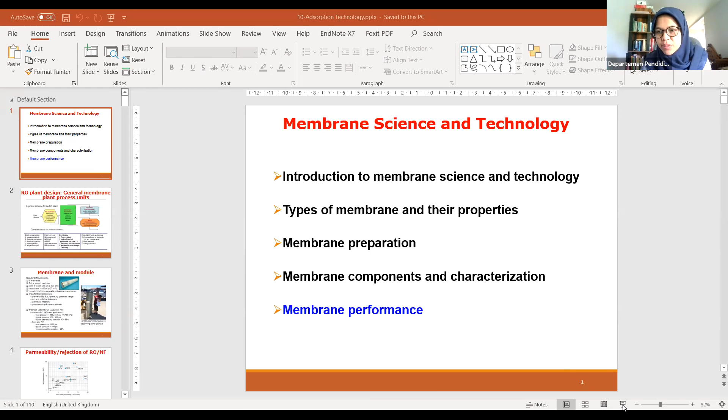Do you need to wait until 8? I think it's okay. You can deliver some introduction or information to the students before your lecture. My clock shows 7:58, so 2 minutes more left. Maybe I'll just start, okay.

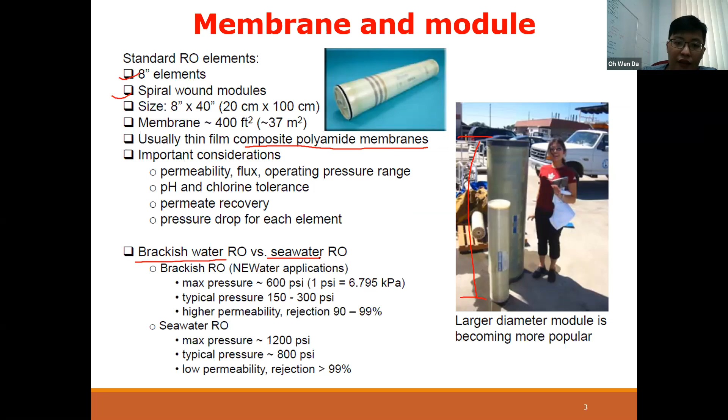So here's some information on the different types of commercially available membrane. These are all the commercial names of the membranes. The gray color one is the RO membrane, and the blue color one is the NF membrane. You can see the difference in terms of rejection—we call it NaCl rejection. As expected, nanofiltration is not as good as the RO membrane in terms of rejecting the salt.

But of course, there's a cost for high rejection of NaCl. If you have high rejection of NaCl, you probably have a lower pure water permeability. You can see that here.

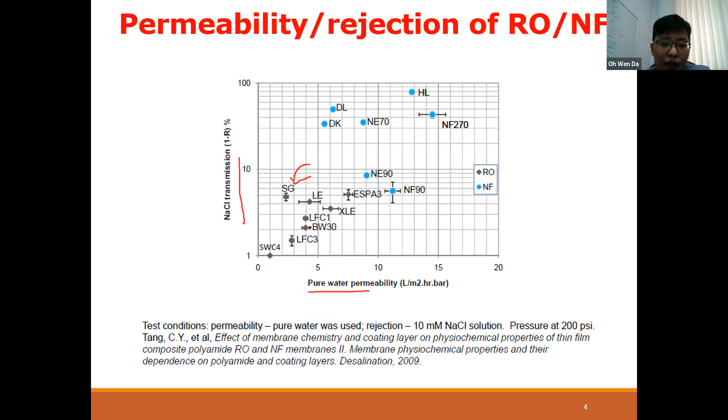Okay, so when you purchase a membrane, usually you will get this kind of brochure. This information will tell you about a lot of things. You can know what is the sodium chloride solution concentration that it tests, the permeate recovery, pH range, and so on. All these data are available and provided by the manufacturer.

Okay, so this one is also the same. I will not talk a lot on this, you can go through it. And this one, the chlorine tolerance, is important.

When you want to apply a particular membrane, you need to check the operational temperature. Usually the polymer membrane or organic membrane cannot tolerate a high temperature. For polyamide, you can only go up to, I think, 45 degrees Celsius. For ceramic membrane, you can go higher, up to 100 degrees Celsius or maybe higher, depending on application. Of course, water boils at 100, right? So that means we usually apply ceramic membrane for other applications.

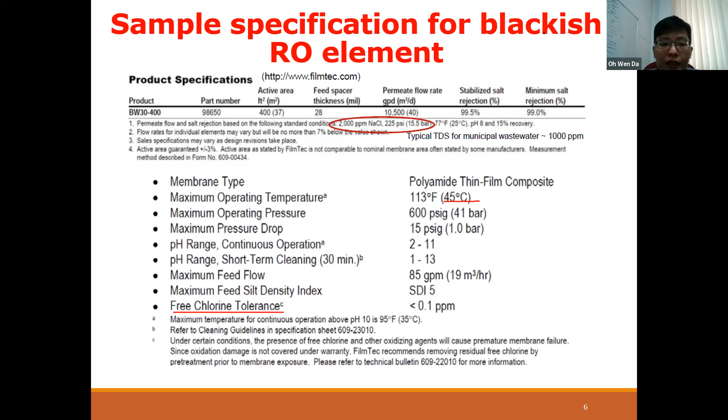Okay, so for membrane pressure vessel, this one is what we call a pressure vessel. This whole thing, and inside this pressure vessel, you can see there are a lot of these things, this box here - each of these is a membrane element. So you usually have 6 to 8 elements inside the pressure vessel. Usually we represent it this way: the feed comes in, and this is how we draw each of these pressure vessels.

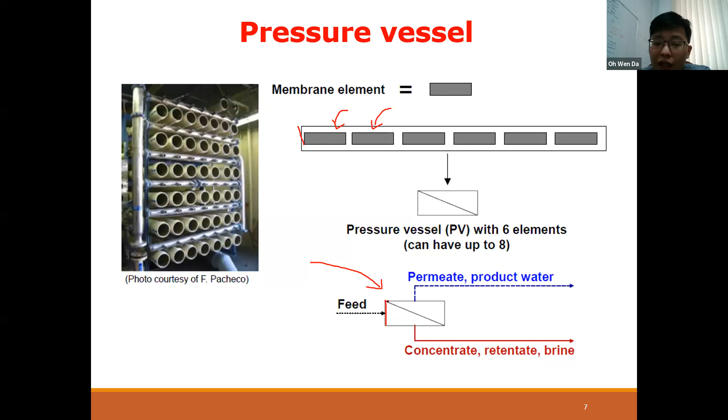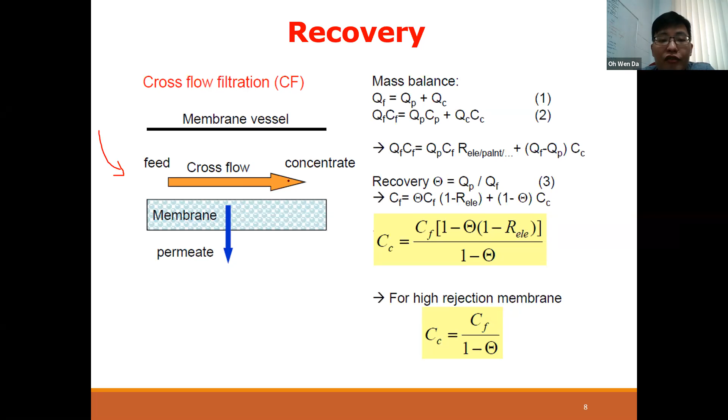So some additional information for you to know - we can calculate a lot of different parameters using all these equations, for example mass balance, recovery, and rejection. For real application, if you go to the RO plant, usually they apply the cross-flow filtration configuration. I hope you still remember this configuration, we talked about it last week. This is usually used for UF, NF, and RO membrane. Very seldom you'll see people use the dead end configuration, because of the fouling factor.

So if we look at the recovery data - by right, if you want to recover more water, you will need to use more energy because you are pushing the water against the osmotic pressure. For seawater, osmotic pressure is very, very significant, very high. That's why sometimes it's more economical to recover only part of the water, maybe up to 50%.

For example, I have this NEWater recovery. This NEWater is secondary effluent water - the secondary effluent from a wastewater treatment plant. After the secondary treatment, it is channeled to the RO system, and this RO system allows recovery of the secondary effluent. So NEWater is a trademark name for secondary effluent reclaimed water in Singapore. If you go to Singapore and mention NEWater, most people there know exactly what it is.

So the advantage of having high recovery is that you probably have lower feed flow rate for a given permeate, and the other one is smaller volume of concentrate generated, meaning the brine or waste that you have will be a lot smaller compared to when you have lower water recovery. So when we talk about recovery, it means how much water, what percentage of water, you can take out from the wastewater. Let's say you have seawater and you can take out 50% of water from it - that means your recovery is 50%.

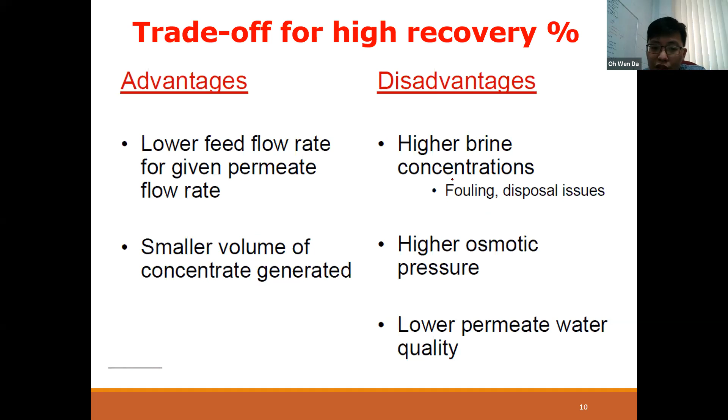But the disadvantage, if you are using high recovery mode, you tend to have fouling, probably higher osmotic pressure, and lower permeate water quality. Usually when you have this higher recovery, that means on the other side you have very high osmotic pressure, so some of the contaminants from the waste on the concentrate side may leach into your permeate water. That's why you have lower permeate water quality.

Today we want to try to see whether we can achieve zero liquid discharge, to an extent where we can recover 100% of water. There are advantages of doing so - it will give you more water, you don't have to worry about the water problem. It will cause less environmental problems, because the waste generated from recovering water will be lower. If you can recover 100% of water, those wastes will probably become solid. If you remove all the water from seawater, you will have all the solids remaining in your container - that is the salt and dissolved solids.

Another consideration is that you will probably have increased regulatory pressure on brine disposal. But of course there are also penalties like lower water quality, higher osmotic pressure, and so on.

So you can see here in this figure, this is in Sydney. They are doing this kind of treatment, trying to recover the secondary effluent. In general, if you look at water treatment using RO technology, you want to use the zero liquid discharge method, which means you want to recover all the water up to 100%.

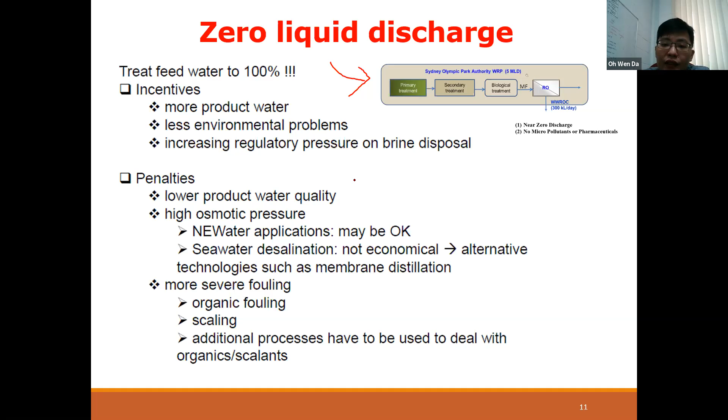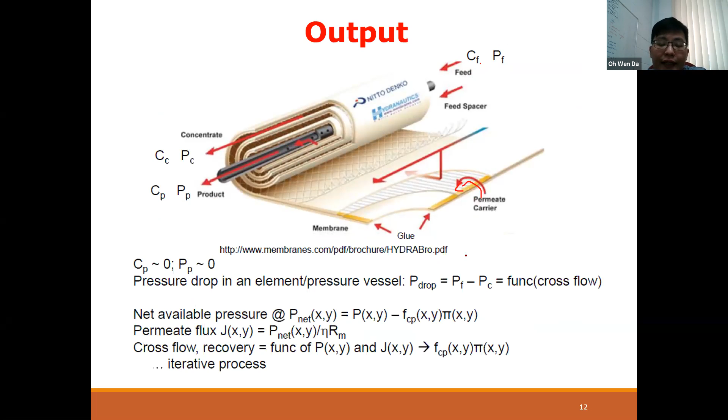So this is more about how we can calculate different parameters. In each pressure vessel, you have various membrane elements, and each element you will use. Let's look at this element.

There are many ways, many configurations that we can do. Usually when people want to design and implement this RO system, they can design it so whether they want high permeate recovery, high water recovery, the lowest energy configuration, or the lowest fouling configuration. All this depends on the desire of the manufacturer and the desire of the operator.

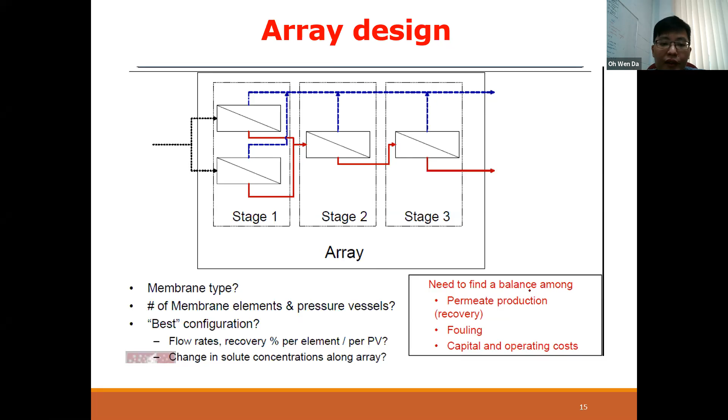So in terms of arrangement, let's look at some arrangements - each has pros and cons. For example, if you look at the staging, you need four different pressure vessels - this one, 2, 3, 4 pressure vessels. And in terms of water recovery...

Let's say you have 80 in the feed, a flow rate of 80, and it goes to each of these membranes, the first one and the second one. Of course you split to 40-40, and then after that you go to another one. It becomes 20 because you recovered 20. In the end you will get 60 water as your permeate, and 20 as your concentrate. So for this recovery, you need 4 different pressure vessels.

And the other one, the tapering mode, whereby you only need 3 pressure vessels, but you can achieve the same effect.

You can see from here that this kind of configuration plays a very important role in terms of whether you can achieve the highest recovery at the lowest cost or not. Some people may wonder why we need to have 4 of these different pressure vessels when you only achieve what a 3 can achieve.

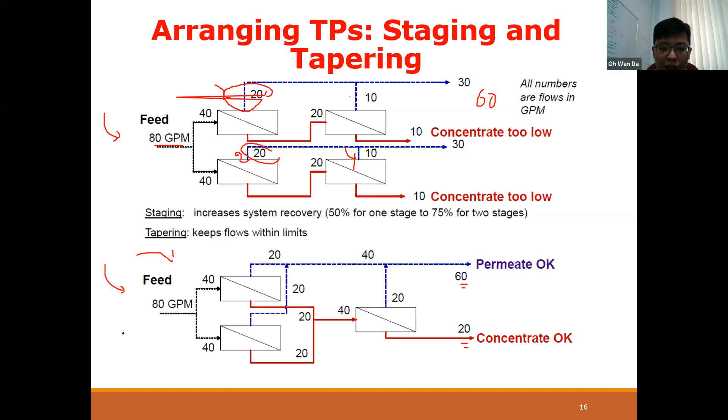Sometimes people choose the 4 pressure vessel instead of 3 because of fouling issues. But sometimes it's not practical to use the staging, also because it depends on the condition.

Why do we choose all this? What you need to know is why we choose these different configurations is because of different reasons. Sometimes we want more permeate, sometimes we want less fouling. So it depends on the operator - they can choose whichever configuration they want.

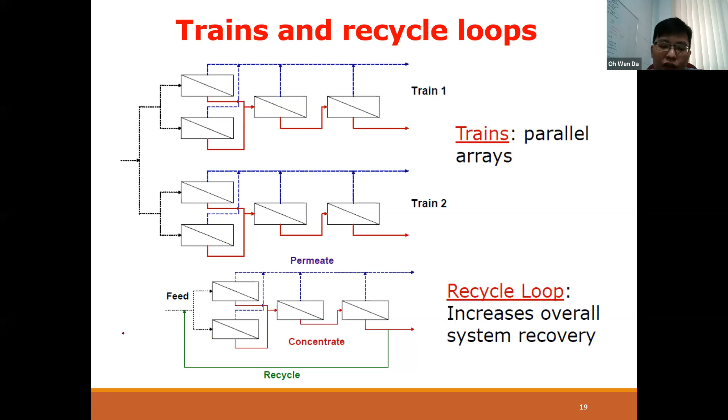Now we have a system whereby we just need to press a button and the configuration can change, very easily - it's interchangeable. We also have the train setup, recycle loop, and so on. So all these configurations have their own purpose.

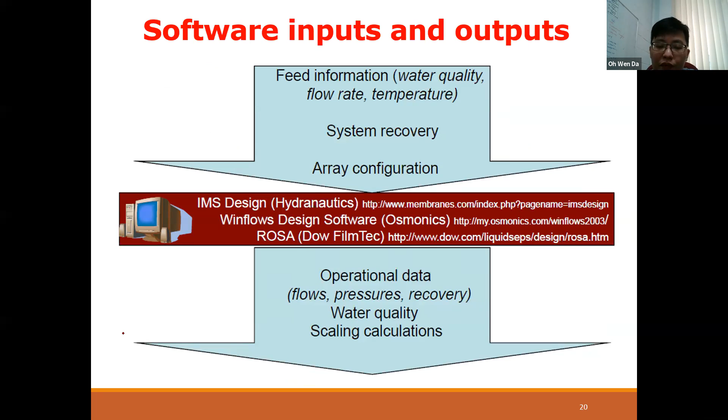So to control the operation, people use software. Now it's very simple, only software - you just need to press certain commands in the software, and all those designs can be implemented.

So if we compare different stages, like I said, this will depend on the operator themselves. One stage, maybe if you want to do one stage, you can recover maybe 53% of water, compared to 3 stages where maybe you can recover more, 85%. But if you look at the cost itself, 3 stage is relatively cheaper compared to 1 stage.

Why is 3 stage cheaper than 1 stage? It's because the brine that you have in 3 stage may be containing a lot of energy. The brine in the 3-stage can be used to provide more energy compared to the brine in the 1-stage. Sometimes they do recover the energy from the brine, and there are a lot of reasons why 3 stages can sometimes be cheaper than 1 stage.

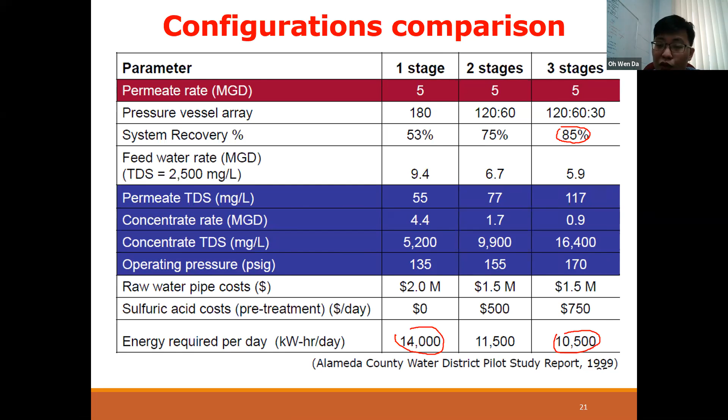But of course, this is just the operating cost - it does not include the capital cost. Capital cost for 3-stage is obviously higher compared to the 1-stage system, because you need to have a bigger space, and you need to install more RO membrane and so on. So there are pros and cons.

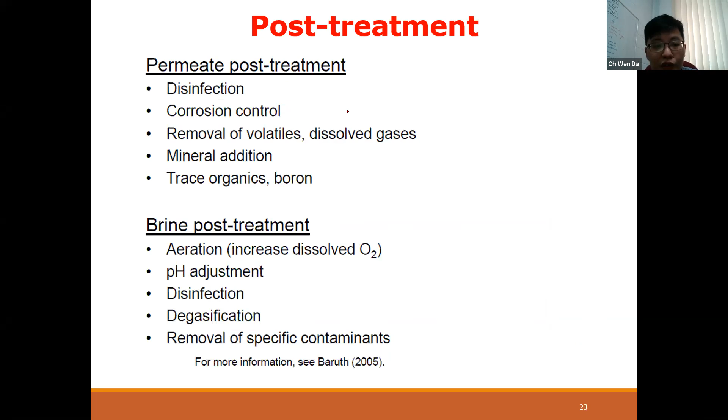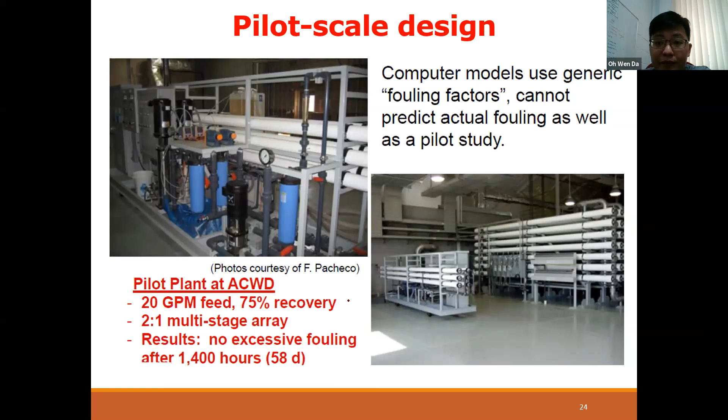So another example I want to share with you - maybe some of you have heard of NEWater before. Like just now, I mentioned a bit on NEWater, so I just want to share a bit on this technology. I believe this is one of the very groundbreaking technologies.

Because if you go to any conference in the world, if you have the opportunity to go, definitely when people talk about water reclamation, some people will to some extent mention Singapore. Some of the presenters will use Singapore as an example - why is that? Because of NEWater.

In Singapore, I believe they are one of the first countries to produce water from secondary effluent. Because Singapore is a very small country with very limited water resources, because of this, they are actively looking into getting water from everywhere.

Currently, Singapore has 4 water sources. One is from Malaysia. One is from seawater, which means desalination. One is from stormwater. The other one, if not mistaken, is reclaimed water.

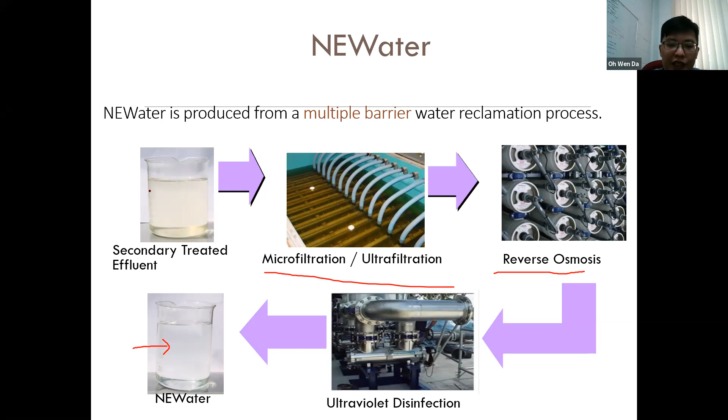So we have quite a number of different contaminants being removed. The first step, microfiltration, removes a lot of large particles, bacteria, and so on. After that, it goes to reverse osmosis, whereby inorganics, virus, everything is removed. Reverse osmosis alone is very clean, but there's an additional barrier just in case some bacteria escape.

It could get into the permeate, so they have UV disinfection. In terms of water quality, you can see it for yourself - if you compare with the WHO standard, tap water, or reservoir water, the difference between NEWater and other water is quite significant. NEWater is very, very clean.

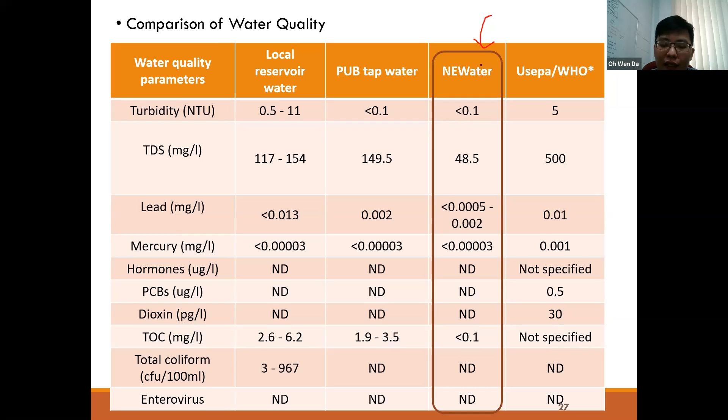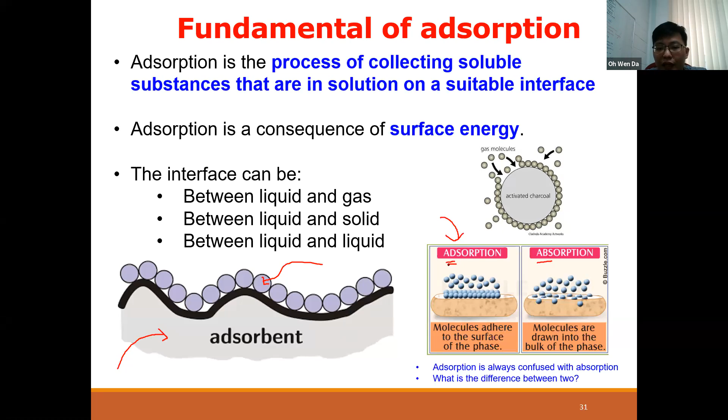In general, adsorption (AD) means a pollutant attached to the surface of the adsorbent. Absorption means the pollutant moves inside, into the bulk phase. There's a difference, so what we're going to talk about is this one, with the AD, adsorption. This is the exact definition of adsorption and absorption. An example of absorption is like a sponge - if you take a sponge and put it inside water, the sponge will be able to absorb the water. This is an example of absorption.

In terms of adsorbent, we have a number of adsorbents - for example, silica gel, activated alumina, and so on. All these adsorbents have different use cases. For example, silica gel is usually used for removing water. If you go to the supermarket and buy a pack of biscuits, inside the biscuit they sometimes put a pack of silica gel - this is to absorb the moisture.

This adsorption of moisture is reversible, so you take the silica gel, put it in an oven, and all the moisture will go away, and then you can reuse the silica gel again. Other types of adsorbent like activated alumina, activated carbon, polymer, clay, and even zeolite are quite widely used for various applications. But for water and wastewater treatment, the most widely applied adsorbent is activated carbon - it's very popular for water treatment.

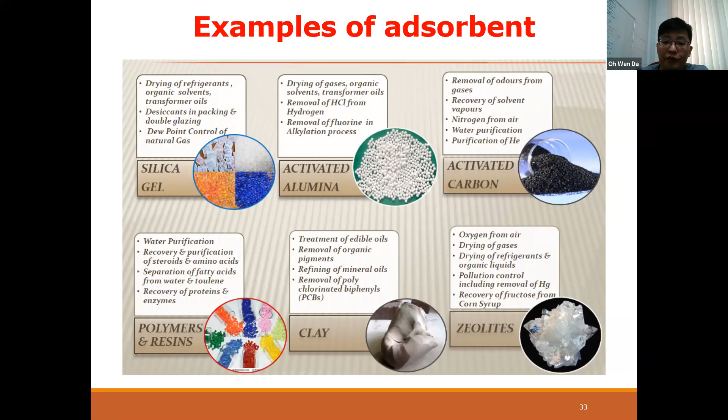So I already talked about adsorbate and adsorbent. What's the difference between adsorbate and adsorbent? This is how we name it. So why is activated carbon so good?

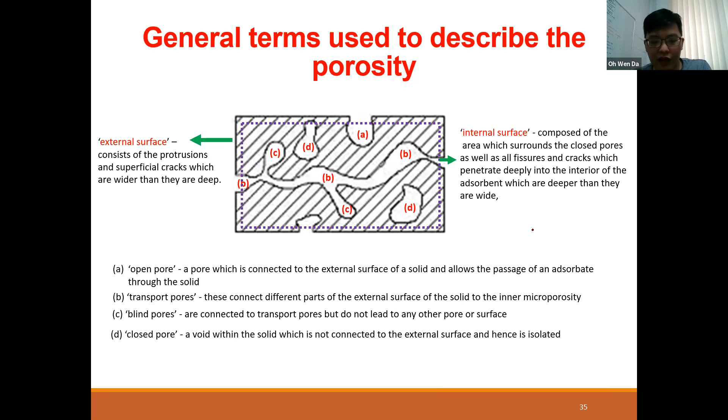It's because it has high surface area. Activated carbon itself is very porous, and because of that porosity, it has a huge amount of surface area which can be used for adsorption. In an adsorption process, you always want something with high surface area, because the higher the surface area, the better adsorption capacity you get. The driving force of adsorption is the energy on the surface.

The common adsorbent, as I mentioned, is activated carbon, which comes in two different forms: one is the granular form, the other is the powdered form. The difference between granular and powdered is in terms of size. Granular is relatively larger, whereas powdered, as you know, is very, very small.

The characteristics of GAC and PAC are also very different. GAC usually has a lot of macropores, mesopores, and micropores, whereas powdered activated carbon generally has abundant micropores, with very little mesopores and macropores. I hope you're familiar with the terms mesopores, macropores, and micropores. In general, macropores are the largest pore, followed by mesopores, and the smallest is the micropores.

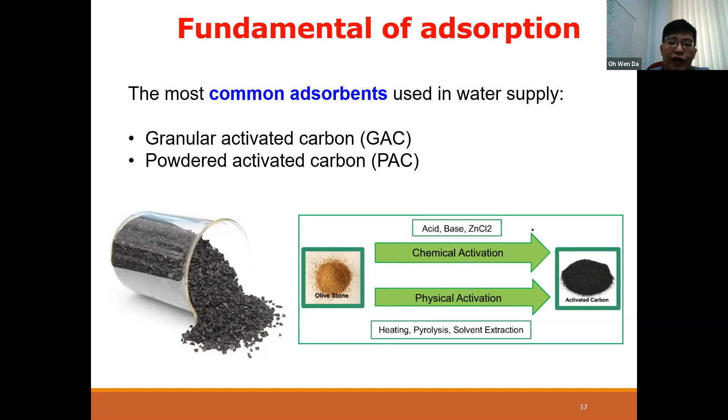In terms of kinetics of adsorption, GAC adsorption will be slower compared to PAC. But GAC has its own use case: because it's larger, it's relatively easier to pack into a column. PAC, you cannot use for column study. Column means a continuous adsorption process. You can only use a batch system for PAC.

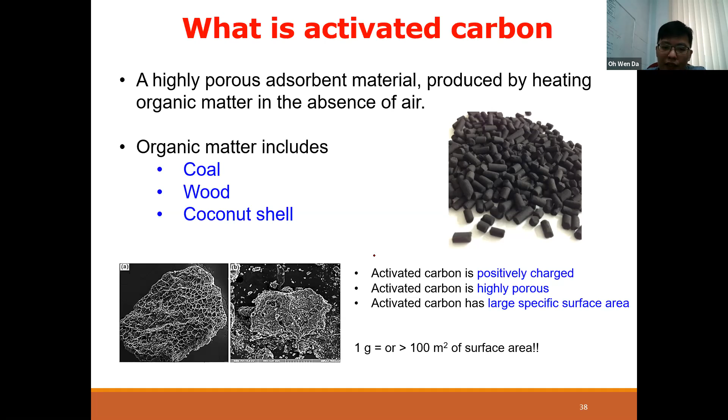For activated carbon, it has to be porous, that's why we apply it. Porosity means high surface area. To prepare activated carbon, usually we use organic matter and carry out a pyrolysis process in the absence of air, so you end up getting a black colored carbon material. Generally, activated carbon has the following properties: positive charge, porous, and large specific surface area.

So how does it work? Generally, you just take this carbon, put it in water that contains contaminant, and all those unwanted substances, organic pollutants, will attach to the carbon. Once they attach to the carbon, we consider it removal—they are removed from the water.

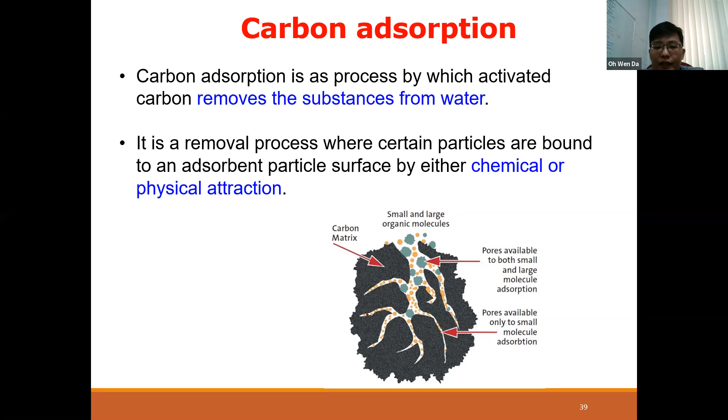The pollutant, the chemical, can attach to the carbon by two different means: one is chemical attraction, the other is physical attraction. The difference is in terms of adsorption energy. For physical adsorption, the energy required is relatively lower, and you form something called a van der Waals interaction, which means the pollutant is adsorbed quickly on the surface of the activated carbon.

This process is reversible, and it can also lead to the formation of a monolayer, double layer, and more than 2 layers, 3 layers, and 4 layers. What's important for physical adsorption to happen is the surface itself, because the pollutant attaches to the surface directly, which is why the higher the surface area you have, the more likely physical adsorption will happen.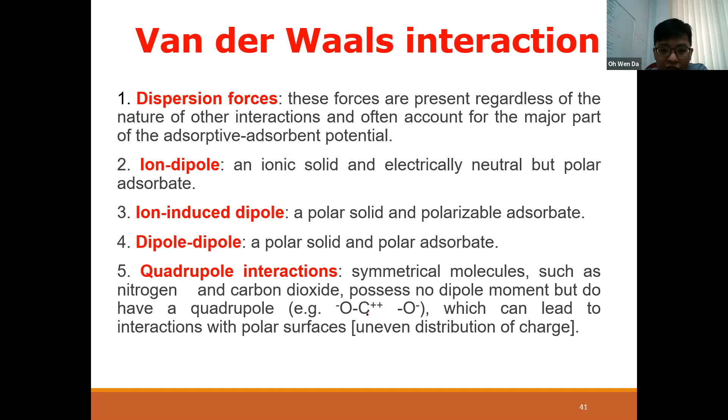These are the interactions of physical adsorption: we have dispersion forces, ion-dipole, ion-induced dipole, and so on—many different types of interactions depending on the functional groups on the surface of your adsorbent. Whereas chemisorption means you are forming a chemical bond on the surface of the adsorbent. With this kind of chemical bond formation, the adsorption process may not be reversible. This usually requires high heat of adsorption to form a very stable bond, which can be covalent.

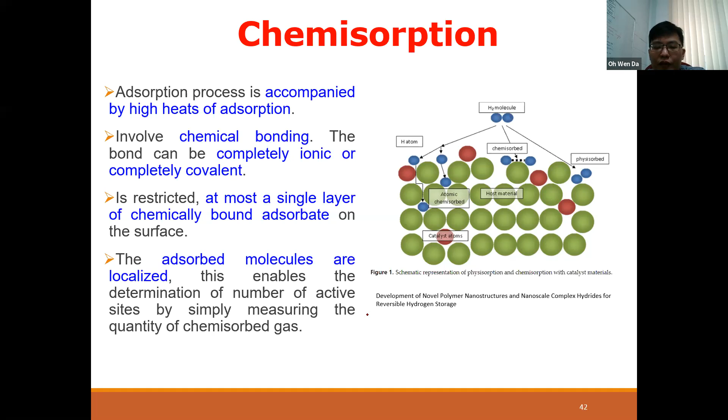Covalent is a very strong bond, so in terms of whether it's reversible, it's not really reversible. What is important for chemisorption to happen is the functional group, the active sites, the active sites that can cause bonding. And it's not the surface area, which means that if you have activated carbon that only has very limited active sites, you will not have a very high adsorption capacity.

So for activated carbon to work, you have to have several things. One is you have to have high surface area, and activated carbon relies on physical adsorption. The carbon that you use for water and wastewater treatment, mostly we want physical adsorption to happen, because physical adsorption is able to attract more different pollutants, different types of pollutant. It's more versatile.

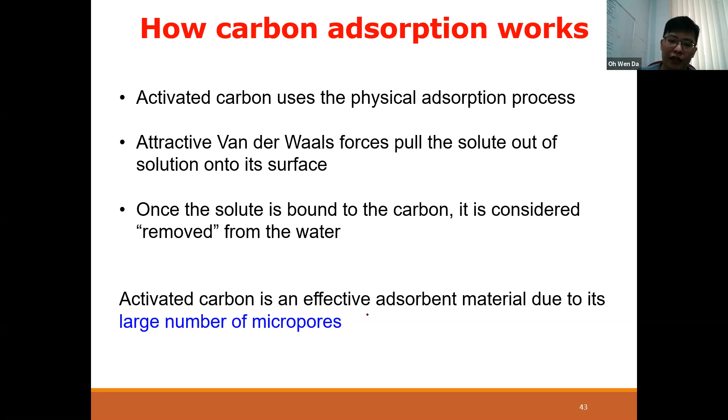What you are doing is that you are actually attracting that particular pollutant onto the surface so that you can actively remove it. So what happens in terms of mechanism is we have three steps. The pollutant has to come into contact with the activated carbon, it goes into the pores, and then it is adsorbed. So you can go through this.

So general application, in terms of substances that activated carbon can remove, it is not so good when you want to remove things like arsenic, bacteria, or virus. Because bacteria or virus cannot be adsorbed, for one thing. And sometimes bacteria are too large, they can block the pores of your activated carbon.

AC can be used to remove bad taste, chlorine, and radon, and VOCs, volatile organic compounds. But not so good when you want to remove things like nitrate, iron, and so on.

Especially heavy metals. If you look at the larger scale application in the wastewater treatment plant, generally AC is not used to remove heavy metals because of their low adsorption capacity. Of course, if you look at the literature, you can see a lot of people reporting the use of activated carbon for removing heavy metals. But that one, they design it to remove the heavy metal, they design the activated carbon for that application. But in general, when you look at the real application, it has poor heavy metal removal.

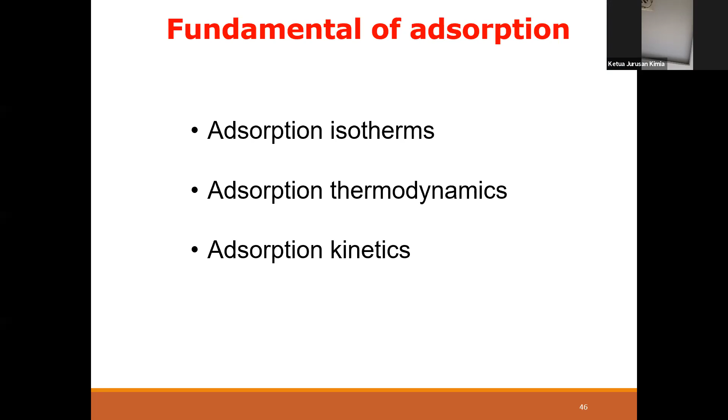Okay, so let's talk a bit about adsorption isotherm, thermodynamics, and kinetics. I assume that you all have been exposed to these three things, so I'm going to discuss it in more depth.

Why do we want to have an adsorption isotherm? If you Google any adsorption paper, almost 99.9% will have an adsorption isotherm study. The reason is because we want to look at the behavior of adsorption under equilibrium conditions. By studying the behavior, we can know the adsorption tendency—whether it's faster or slower towards a certain pollutant. We can also know about the capacity. That's why every time we design a new adsorbent, we need to know how to use this isotherm to understand how the adsorbent behaves.

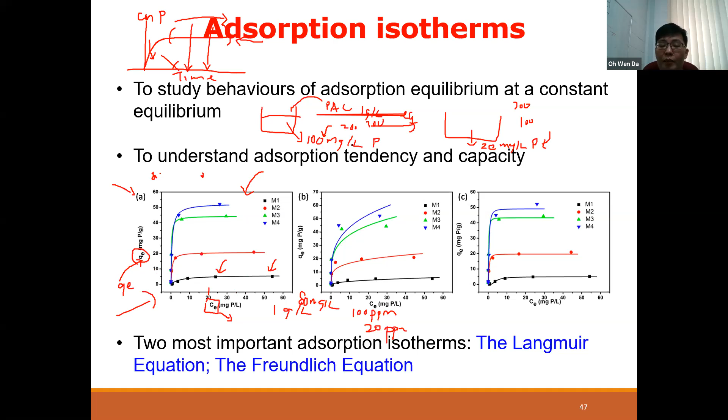So after getting the data, you can plot this graph. You have the equilibrium concentration, and you calculate the amount adsorbed, then you can plot the isotherm. A lot of people use the Langmuir equation and Freundlich equation to model how the adsorption isotherm happens. Generally, if you look at Langmuir, it's about equilibrium adsorption derived using kinetics.

In general, your adsorption process can be represented using this kind of chemical equation. You have your solute, or pollutant, plus your adsorbent, and you get SA — which means your pollutant has been adsorbed onto the activated carbon. So usually we can say it like that.

The initial concentration is C0, and after equilibrium, the concentration of your pollutant becomes CE. But this SA, the adsorbed species, will have a value — initially it's 0, then it becomes C0 minus CE.

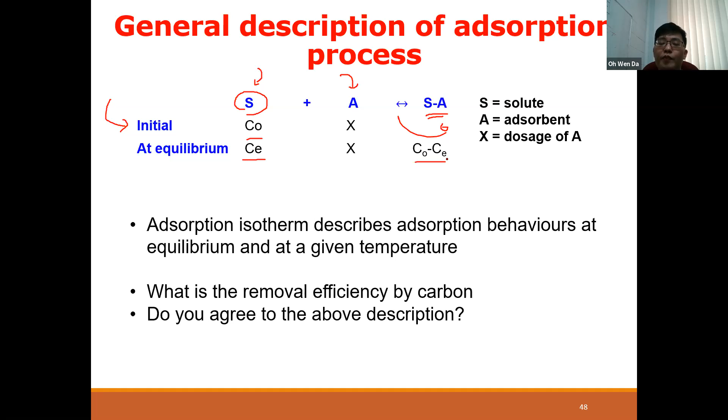So we usually prefer to present it in a different way. We prefer to look into this adsorption system in terms of the surface coverage. That will be more meaningful so that we can use this surface coverage to measure the adsorption capacity, and also to look at the lifespan of the adsorbent if we introduce it into the system. That's why in adsorption study we usually prefer to present it like this.

Initially, you have C0, and at the initial state, your surface coverage equals 0. Surface coverage means how much surface has already been taken up or occupied by the pollutant — if it's 0, that means your surface is still not contaminated, it has no pollutant on the surface. At equilibrium condition, you have this value, which is theta equilibrium, meaning a certain amount of pollutant has been adsorbed. It can be used to reflect the number of adsorption sites.

I'm not going to give you a very detailed derivation of Langmuir, but if you look at the Langmuir model, it is derived based on the kinetics. It's derived based on the rate of adsorption equals the rate of desorption. From that equality, you can actually derive the Langmuir isotherm equation. You can go to Wikipedia, which provides a very good explanation on how the Langmuir model is derived.

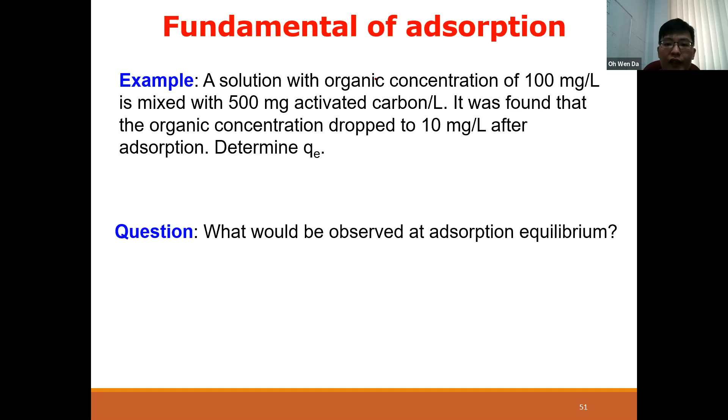So this slide is just to show you how to calculate the adsorption capacity. You can go through this. What I want to share with you is in terms of the parameters.

When you conduct a study and get the Langmuir model, you will get two parameters. The first, the equilibrium constant, reflects the adsorption tendency. The higher the value you have, the better the tendency for that particular pollutant to be adsorbed.

So in general, this K parameter, logically if you look at it, is the equilibrium constant. The larger you have, that means the rate of forward reaction is faster, because your K is always equals to K over K prime, whereby one is the forward reaction, one is the backward reaction. So when you look at the K value, if it's larger, that means your tendency will be faster.

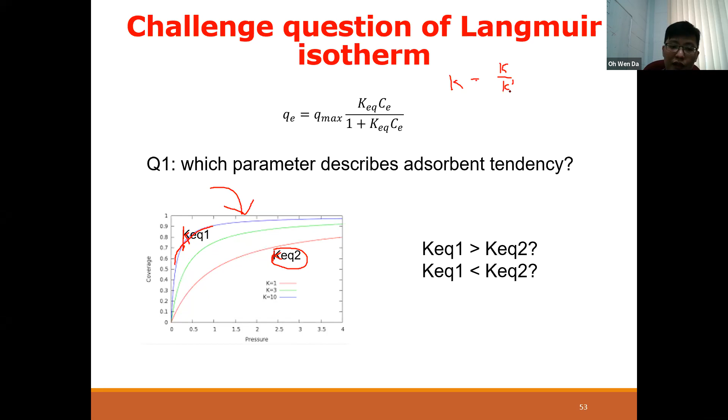The other one is the Qmax. Qmax is the parameter that reflects the adsorption capacity. But this is only theoretical, which means it does not really reflect the actual adsorption capacity of the adsorbent. It is only theoretically derived maximum adsorption capacity. But most of the time, from my experience, it does give quite a good estimate of the adsorbent. But of course, you know the limitation of the Langmuir model.

If you studied the Langmuir model before in a previous course, you know that if you want to apply the Langmuir model, you have three conditions that has to be met, three assumptions. One is that you have no lateral interaction between the pollutant on the surface. The other is monolayer formation. And the other is that the energy of adsorption is equal at every site. So these are the three assumptions of the Langmuir model.

And in most cases, all these assumptions are not so valid, because with activated carbon, when you have adsorption, you have more than one active site. This means that the adsorption energy may not be equal throughout the activated carbon.

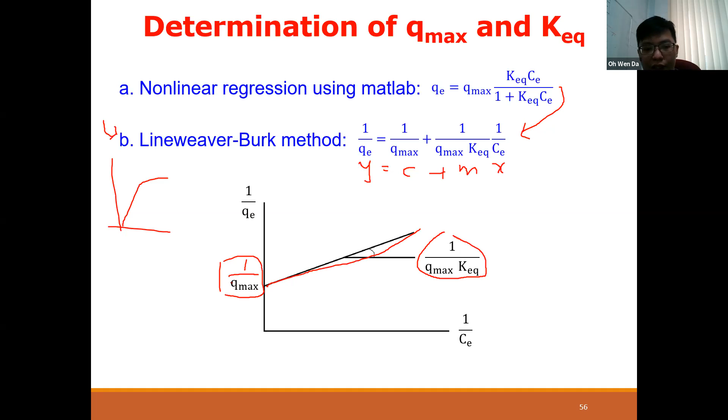Other methods include this one, also a linear method, just that the equation form is different. Same thing with the Eadie-Hofstee method. QE equals Qmax minus 1 over K times QE over CE. This one is your X, this one is your Y, so your intercept will be Qmax. For the uncertain method, this one is your Y, and this one is your X, so this is your Y-intercept.

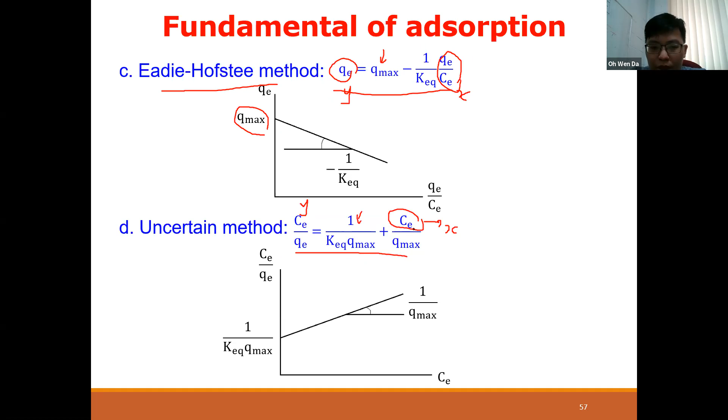So of all the methods that you have, different methods that different people use, you can determine what is the Qmax and K.

There is a problem in terms of consistency. If you look at the literature, you take their data and try to see whether what they do is correct or not. Let's say they are using a non-linear regression method, and you transform their data into a linear method. Sometimes you'll find that your linear method compared with your non-linear method has a huge discrepancy. From 300, let's say this Lineweaver-Burk method gives 300 for Qmax, non-linear gives you 370. Your equilibrium constant also varies depending on the method that you use.

So what does it mean? Which one is the correct one? For your standard deviation... so what does it mean? It means that the linear method itself is problematic, sometimes. And if you really want to carry out an adsorption study, you need to make sure that the data you have is reliable and not just a few points. Otherwise, if you only have a few points, let's say your isotherm only has 5 points or 4 points or less, and you convert it into the linear form and then use it to determine your Qmax and K value, there's a very high chance that what you're doing is wrong. It's not correct. This is due to the big random data error.

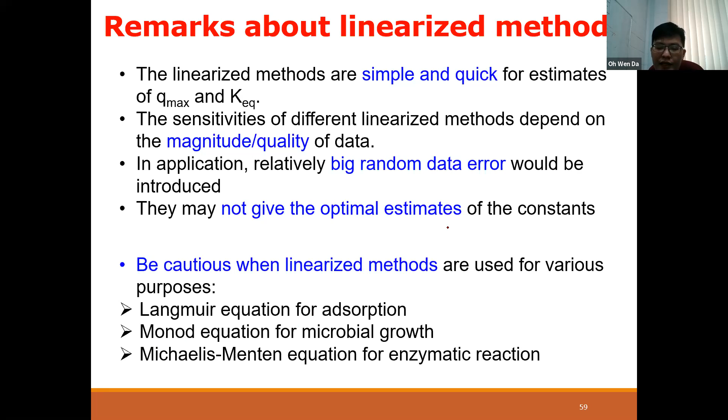So you have to be careful when doing linearization, especially for some of these like Langmuir, Monod equation, or Michaelis-Menten. These are all commonly seen in enzyme studies, microbial growth, and so on. You have to be very careful with this. Next one would be the Freundlich isotherm, which is also very commonly used. The two very common ones, as I said, are the Langmuir and Freundlich isotherm. It has to be there. Every paper you see will definitely discuss these two. You cannot miss them.

So this Freundlich isotherm is an empirical isotherm, which means it's not derived based on a mechanism. So you have a mathematical model that's derived based on mechanism, and one that's derived based on empirical observation. For empirical derivation, let's say this is empirical. Usually the constant that you have does not have a very clear physical meaning, which means you cannot really interpret the values in a mechanistic way.

Like with Langmuir, you can say that the K value increase means the adsorption tendency is higher. But for the Freundlich isotherm, because it's empirical, we cannot say the same thing. We cannot say that K value increase means which one is higher and so on. So the physical meaning of your Freundlich isotherm is not clear. But the good thing is that we can look at the trend.

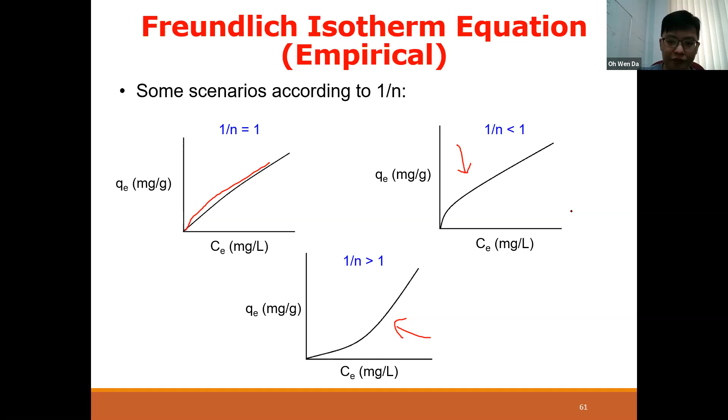So for 1/n, in this case, if 1/n is 1, you get a straight line. If 1/n is less than 1, you get this form. And if 1/n is more than 1, you'll have something like this. They are an empirical model. To estimate this Freundlich isotherm, some people use linearization to get this form - that's one way. The other way is to directly use this equation, using the non-linear form instead of the linear form. But like I said, when you linearize it, you have to be very careful. If you are only using 1 or 2 points of data, you may not get the correct value.

And you also need to set a boundary. For Langmuir and Freundlich isotherm, the K and N value have to be positive, and that's the boundary—it cannot be negative. Okay, so if you look at this, Langmuir and Freundlich are the most commonly used.

There are also people talking about Sips isotherm, Redlich-Peterson isotherm, Khan isotherm, and so on—so many different isotherms, BET isotherms. All these isotherms, in my point of view, have their own use case, but some of them are derived for the sake of publication.

When you want to publish something, you have to come up with something novel or innovative. So what most of these people do when they want to publish a paper is they come up with an isotherm of their own, so that they can use that isotherm to model their adsorption equilibrium.

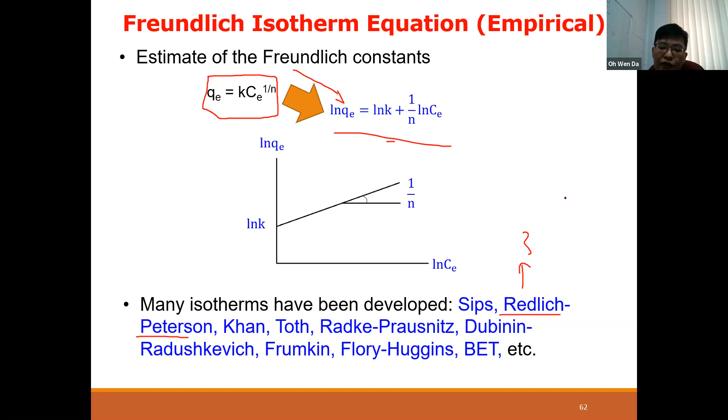That's why I don't really like this kind of game. They play this game whereby they come up with an equation that has more than three constants, and then they say that it fits better than the Langmuir model—which is not really correct, in my opinion.

Okay, so next one—just want to quickly go through this thermodynamics part. Thermodynamics can tell us several things in terms of delta G, delta H, and delta S. These are the three things that a lot of people look into when they want to study thermodynamics. Free energy tells us whether that particular reaction is feasible or not.

You can get a negative value or a positive value, and each has a different meaning. Enthalpy tells us about the heat of the system—if you have chemisorption, you probably have more than 100, depends. The other one is entropy, which tells us whether it's spontaneous or not spontaneous.

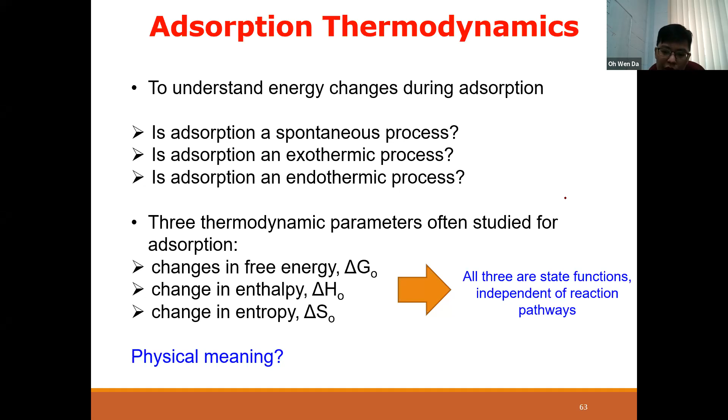Probably you have seen all these symbols in your thermodynamics class. For your delta G, you can calculate easily once you get the equilibrium constant—this you can get from the Langmuir model, and you can calculate what your delta G is through this equation: negative R, where R is your gas constant, usually 8.3145, and T is your temperature. From here you will know your delta G.

The relationship between delta G, delta H, and delta S—you can calculate everything using this equation. This is a linear equation whereby you can get the equilibrium constant at different temperatures. You plot this as your Y, this as your X. From the plot of the linear graph, your slope will be negative delta H over R, and your intercept will be delta S over R.

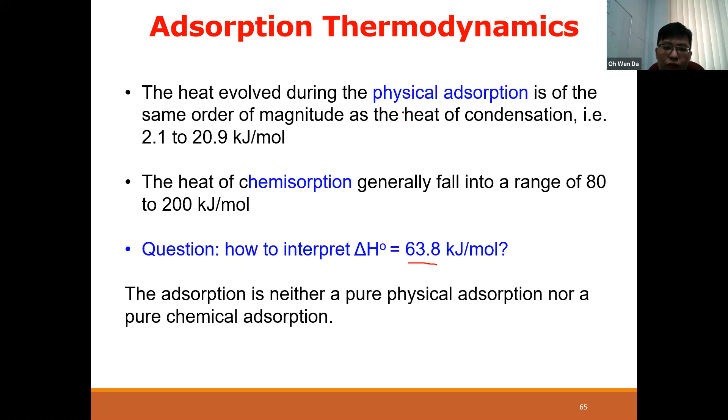So just another problem I want you all to be aware of: if you look at Langmuir, this K value has a unit, but that K value has no unit. So what does it mean? What is wrong here? There's a fundamental explanation for why there's an inconsistency.

The second problem we face when doing this kind of calculation and reading through papers is that some people use different models to calculate delta G. When you use a different model to calculate delta G, the answer is different.

So some people compare directly—some use a Langmuir model, some use their own model, and then they compare directly and say which one is the better one. This is not really acceptable in my opinion.

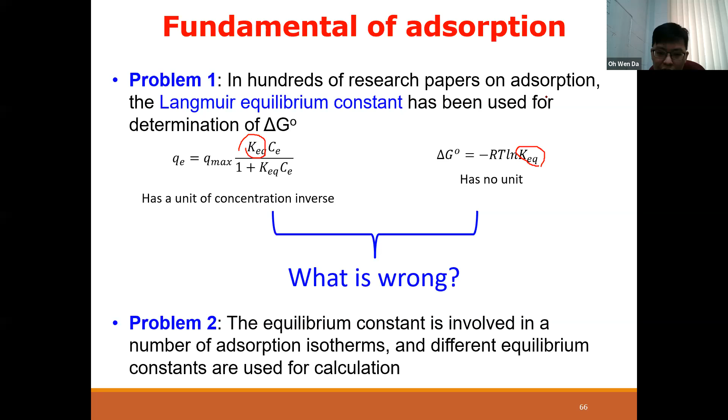If you want to use a model to calculate delta G, it has to be the same model. If you're using K from different models, they are not comparable.

Last one, just to finish up the adsorption kinetics, the last of our three parts: adsorption thermodynamics, adsorption isotherms, and last would be the kinetics that a lot of people are looking into—and there are a lot of problems with kinetics.

If you look at the kinetic study of adsorption, you'll see a lot of people using first order kinetics and second order kinetics. These are the two models people use for adsorption kinetics.

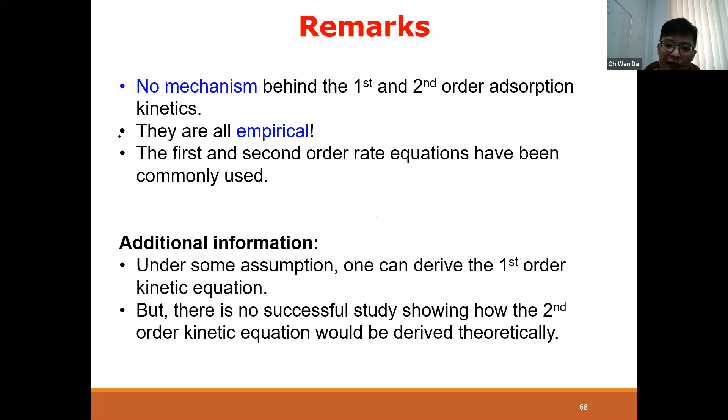They are empirical models, which means no mechanism—they are not derived based on mechanism. So far, there isn't really any successful study that links this first and second order model together.

But of course, if you do some mathematical transformation—this is the first order, this is the second order—you'll find that eventually they can be linked to the same form. So that means there's something between these two models that can be used to describe adsorption kinetics.

This adsorption kinetics, people work in a reverse way. Usually when we want to know the kinetics, we derive the mechanism first, and from the mechanism we derive the kinetics. But for the adsorption case, it has been a very long time...

...people derive the kinetics first and then try to figure out the mechanism. So this is happening in reverse. I don't know why this is happening like this, but a lot of people use the first and second order kinetics because they're able to describe the system relatively well, and no one knows why.

Which means the K value you get from this kinetics cannot be interpreted that easily. You cannot say that the K value is larger than another one and so this is faster. You cannot say that, because all these are derived empirically, and the K value may not reflect the speed or rate of the adsorption process.

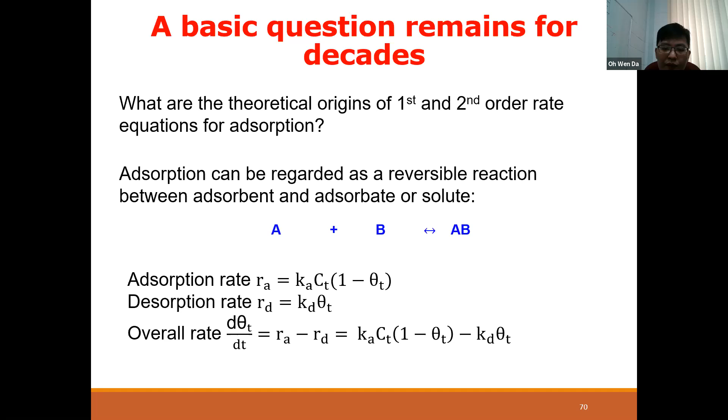Okay, so if you want to derive the rate of adsorption and rate of desorption, you can actually use something like a Langmuir model. And then in the end, if you use the Langmuir kinetics, you will get this form, whereby this one is first order, and this one is second order.

So there's a certain link, but the link is not really clear. That's why people have been struggling to figure out what order this adsorption is. Some people claim second order is better, some people claim first order is better.

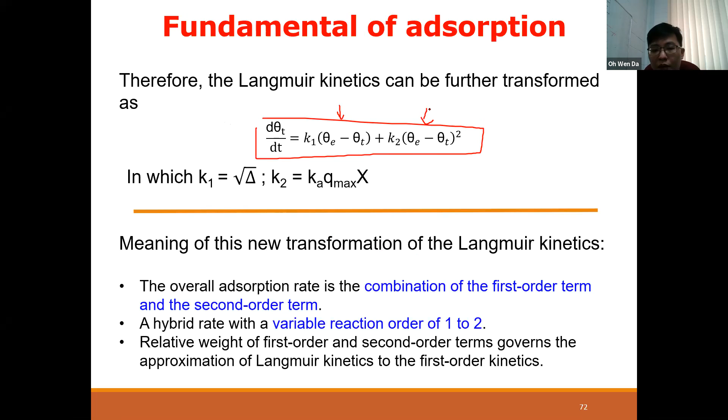So one of the key problems when people are talking about which model is better is the way they do it. They claim first order is better than second order, or second order better than first order, usually based on the R square. R square value is used to estimate the goodness of fit. If your R square value is 1, that means you have a perfect fit.

Most of the time when they use first and second order, what they found is you can have values like 0.995, 0.990, 0.985 — very, very close to each other. You can see here from first order up to fourth order, R square is so close together it's impossible to tell which order is the kinetics. So that's why one of the problems is that R square used as a goodness of fit is not really significant.

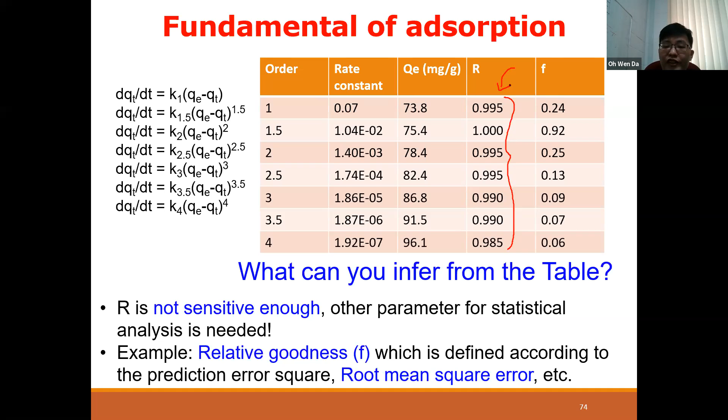You have to have a different approach. One good approach is to use something else like the root mean square error or relative goodness. So this is something you have to be aware of when comparing two different models — not just applying this for kinetics, but for every single thing you do when you are fitting your model.

Okay, I'm going to talk about some applications. I've briefly talked about adsorption isotherm, adsorption kinetics, and also thermodynamics. So now we want to look into the application.

So there are two types of different applications that people can use. One is the activated carbon column system, which means you pack it in a column, and once you pack it in a column, then you flow the water through the column. So this is a continuous system. The other way is a batch system, whereby you just introduce the activated carbon into the water for the adsorption process to happen. Both have been applied to treat real wastewater — batch system and also the column system.

For a column system, usually it's more practical but relatively more complex because there are a lot of parameters that you need to adjust. This is how a column system looks like — you pack the GAC. Most of the time it's GAC, because of the size. You cannot use PAC; if you use PAC, water will not be able to flow through it, you will clog the system. That's why people use GAC, granular activated carbon.

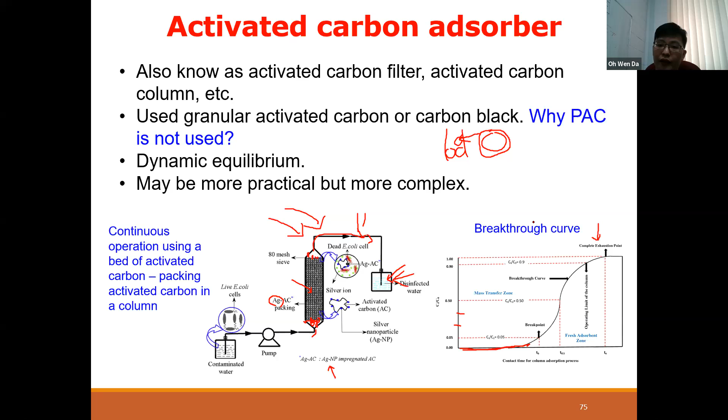Okay, next one is regeneration. Once you have activated carbon, it's a process of concentrating the pollutant on the surface. So once the surface has been filled with pollutant, the activated carbon cannot be used anymore, so you have to do regeneration. You can carry out regeneration using several ways: thermal regeneration, chemical regeneration, or biological regeneration, there are many ways to do it. The common one for large scale regeneration is thermal regeneration. You heat up to a certain temperature under oxygen limiting conditions, then the pores will start to be regenerated.

You can actually destroy the adsorbate through this process. The adsorbed species will be destroyed under heat, and you can recover partial adsorption capacity. But while doing this, definitely some of the activated carbon will be lost because of attrition, and when you burn it, some of the activated carbon may be burned to some extent.

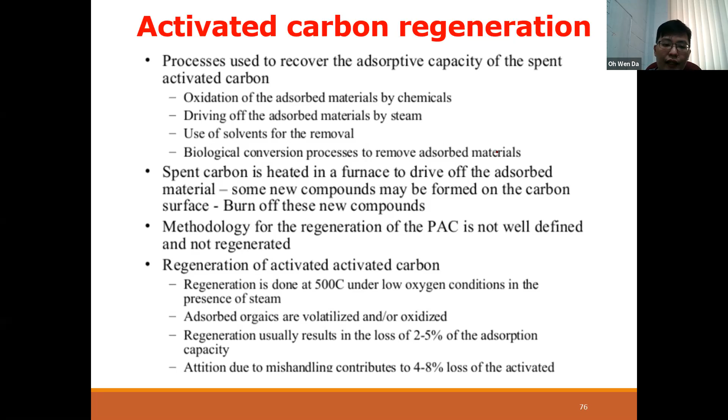So I'm familiar with two forms of regeneration because I did some study on this: chemical regeneration using AOP, and also biological regeneration. In fact, my master's degree work was on biological regeneration of activated carbon, which means using microorganisms. I culture the microorganisms, and then use them to regenerate the activated carbon.

But after some time working in regenerating activated carbon, a very important question arises: do we need adsorbent regeneration? One of the reasons this question is important is because if you look at 20, 30 years ago, activated carbon was expensive. Because it was expensive, it was worth regenerating. But by today's standard, activated carbon is very, very cheap.

So that means we don't really need to regenerate the activated carbon. In fact, we only need to replace it. We can replace it easily, and the replacement cost is sometimes cheaper than regenerating it. That's why now the question is whether we need to regenerate, whether it's necessary or not. Two things you need to consider are the cost and the environmental footprint, and the cost is always the important one. How expensive is regeneration compared to buying a new one?

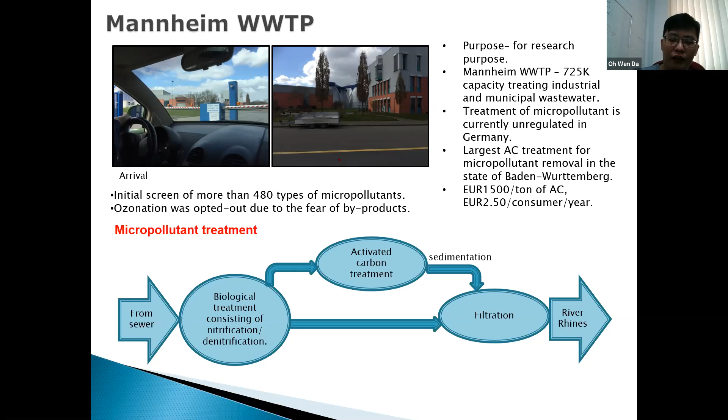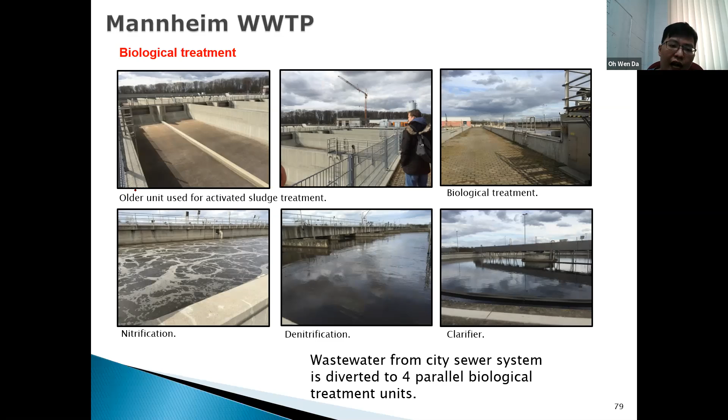If they choose ozonation, it will cause formation of byproducts, so using activated carbon is less likely to give byproducts. So what they have is that first, water flows through and undergoes biological treatment, which is the secondary treatment. After biological treatment, which covers nitrification and denitrification, it goes to the clarifier to remove the sludge. Then they channel the water into an activated carbon tank. This tank contains activated carbon, and they do it like a batch system, not a column, but more like a batch addition of activated carbon.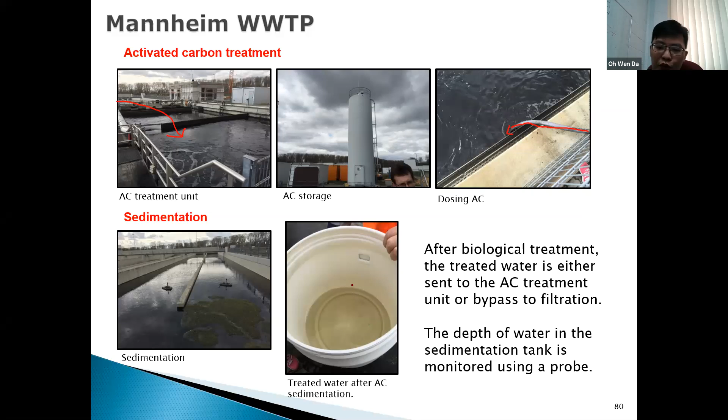What they did was pump this activated carbon using a pipe into the water, so continuously the activated carbon is introduced to the water, along with a certain coagulant. They are using powdered activated carbon. After this activated carbon treatment, it goes to a sedimentation tank, where the activated carbon added with coagulant bind together and settle down. Once it settles, you get quite clean water, but it's not enough, because activated carbon cannot 100% remove all the micropollutants. So they need to channel it to another treatment system using filtration.

They use filtration with anthracite and sand to remove additional particles like PAC particles. After going through the activated carbon filtration system, they managed to remove 80 to 90% of the micropollutants.

Then they discharge this to the Rhine River. Look at the water quality before discharge - it's relatively clean, judging from the color.

They control everything in the control room, which is quite modern. Today we can control everything using a computer, just press a button. If there's any discrepancy, or change - like wastewater flowing in with a pH different from what they want - they can just press a button to shut the water, so it won't flow into the biological treatment system and contaminate the water and affect the microorganisms.

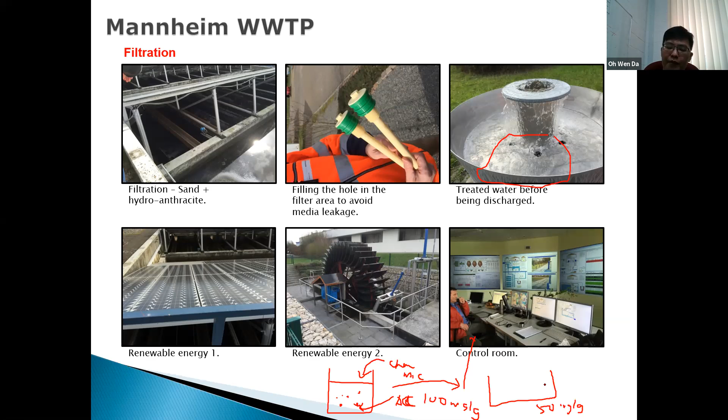Okay, so moving on, I want to show you the techniques people use to prepare adsorbent. Then I want to discuss a bit on how we can characterize the adsorbent, and finally talk about what you have to do so that you can publish in a high impact factor journal, if that's what your goal is about.

Whether your pollutant is hydrophilic or hydrophobic. You have to consider whether you want to prepare it for a continuous system, which means column — if it's column, you have to prepare in a larger size. If it's batch, then you can prepare in powdered form. You also need to look at the cost and resources. So all these are quite critical.

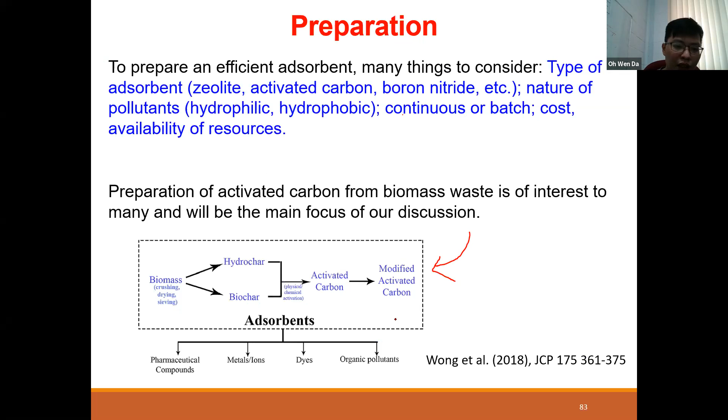You always start with biomass — anything organic that you can find. Let's say you go to your kitchen and take an orange. You eat the orange and peel it first, so the orange peel itself is bio waste that can be converted into adsorbent. If you don't convert it into adsorbent, you will throw it away, it will end up in the landfill, and it will contaminate the environment.

So this biomass waste, in order to convert it into adsorbent, we have to do certain things. For example, with orange peel, the first thing you have to do is crush it and then dry it. Once it's dry, you can make it into very small form — maybe blend it using a blender into a very, very small size, and then sieve it to get the size that you want. So this is a very general approach.

When you want to select the biomass, try to select one with higher carbon content. If you select one with less carbon content, like silica — rice husk, for example, contains a lot of silica — I find it's relatively harder to get a high surface area adsorbent compared to when you use something that contains a lot of carbon, for example sawdust, which has a lot of carbon.

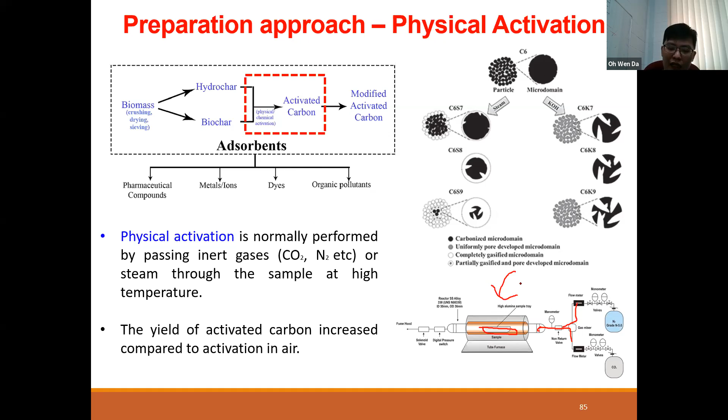Next one is chemical activation. This generally means using certain chemicals, most of the time acid or base, so that you can induce the formation of pores. Some people consider this strategy better compared to using only physical activation. Here's how it works.

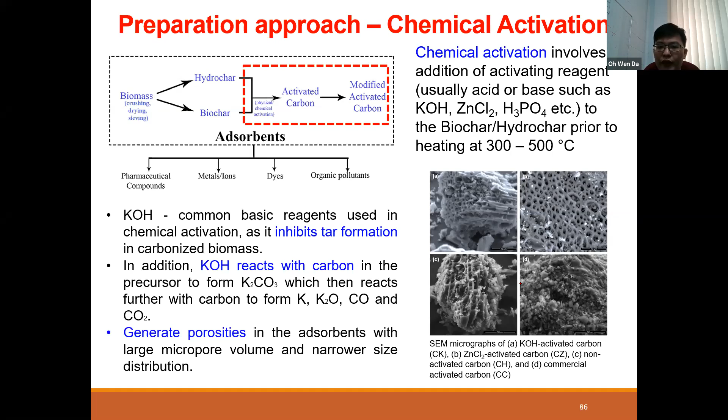Let's say you have potassium hydroxide. You mix this potassium hydroxide together with your biochar or hydrochar. There are a lot of ways to mix it. One way is that you prepare a solution of potassium hydroxide, and then you add in your biochar with the solution of KOH. You mix them together, and then you dry it. Once it's dry, you will get a perfect mixture of KOH and biochar. You take this mixture and heat it up to maybe 300 to 500 degrees Celsius, and you will end up with activated carbon. Some people use different chemicals depending on what you want.

Some people use zinc chloride, some people use phosphoric acid. They have different applications. In fact, some people also use iron chloride. I personally don't like to use metal base, because when you use metal based chemicals...

you will get activated carbon, but with metal attached to it, especially heavy metals like iron. If you use iron, your activated carbon product will have a lot of Fe. So when you want to apply it in wastewater or water, this Fe tends to leach out. So you will have this secondary pollution issue. That's why I don't really like to use chemical activation based on metal.

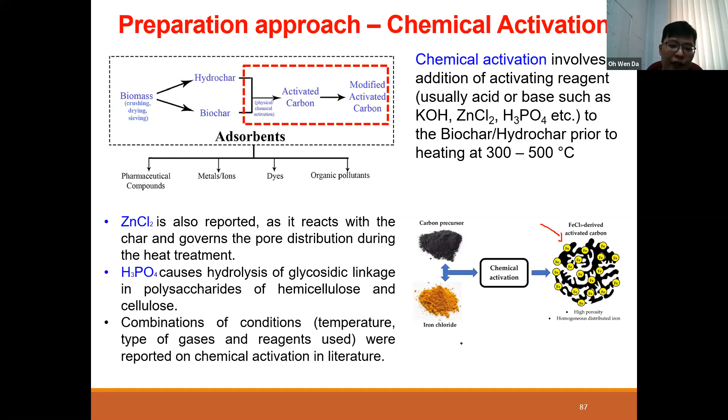So in terms of selection, which one is better, I would say that depends again on your application. Chemical activation, quite a number of researchers say it's better because it has lower energy requirement, and it can help in getting better porosity compared to physical activation.

But there are people doing multi-stage activation, which means you're not limited to a single stage, to choose whether you want physical only or chemical only. You can actually have both together, physical and chemical activation.

But most of the time, 2 or 3 step activation is only fancy for publication. People want to publish a paper, and then they tell you that doing 4-step activation is better than 3-step activation, and so on. Most of the time people do 2-step activation; 3-step activation is just for publication. Whether there's any real application of the 3 or 4-step, it remains to be tested.

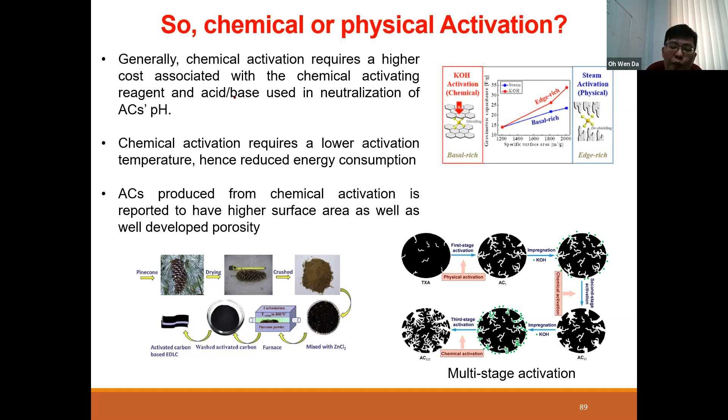So there are many articles that talk about this comparison, you can look through it. One of it has been published in Microporous and Mesoporous Materials Journal, comparing chemical and physical activation. Of course, this journal is saying that chemical activation is better compared to physical activation, because it produces better mechanical properties and so on.

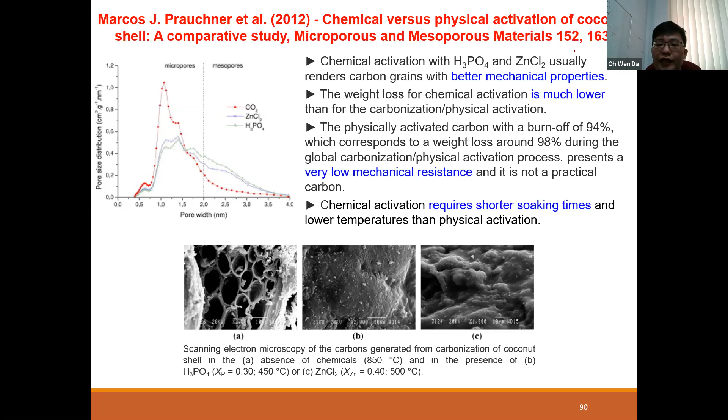So when a journal claims that their method is better than others, you cannot just blindly believe it. Sometimes you have to really look at what they have done, because a lot of people claim a lot of different things. So we have to be very skeptical. This is just to show you that there are studies that compare chemical and physical activation.

Okay, that's about it for the preparation. In terms of characterization, we have many types of characterization techniques. I'll briefly go through this and give you an example of how we can use adsorption study to characterize it. This characterization uses SEM, TEM — they've basically been covered in the membrane part. In general, they reveal data about the adsorption process itself.

So I've seen a question: I would like to control mesoporous versus microporous in chemical activation — is there any special rule in terms of activation condition agent? Well, if you're talking about activated carbon, it's very difficult to control. If inorganic, yes, mesoporous materials such as zeolite, you can control it very easily.

But if you are controlling activated carbon, for porosity control, so far I'm not aware of any study that is really able to tune the porosity, controlling the mesopores. But micropores you can easily control, because every time you prepare using, for example, chemical activation with KOH, potassium hydroxide, you will have a lot of micropores formed. But if you really want to specifically control the activated carbon to have only mesopores, with no micropores in it, that's very challenging.

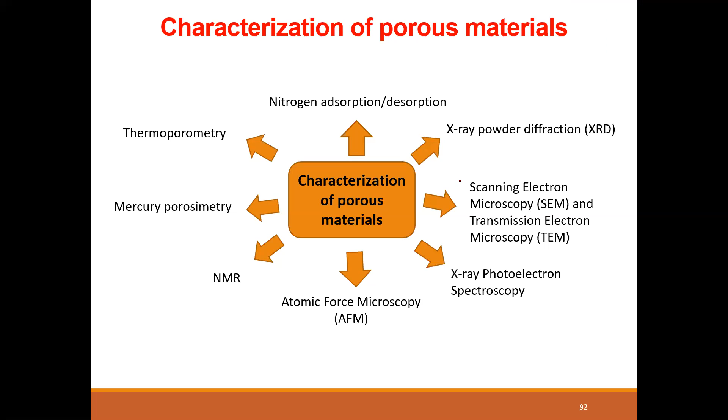This is one of the articles I published last year, on developing boron nitride as an adsorbent. I used this boron nitride to remove heavy metals. I prepared this boron nitride at different temperatures, from 750 to 1050, using a pyrolysis method - mixing urea and boric acid together and heating it up to that temperature.

After that, I did certain characterizations. The first was using XRD. The reason we want XRD is first to confirm what you have. After preparing the adsorbent and getting the XRD pattern, I knew I had boron nitride. After getting the XRD pattern and comparing it with the library, I know the material contains these two main things, matching the peaks you'd have in boron nitride. That's why I can say my synthesis was successful.

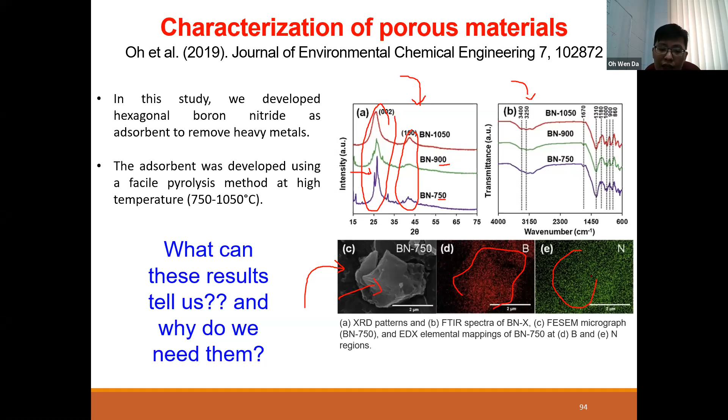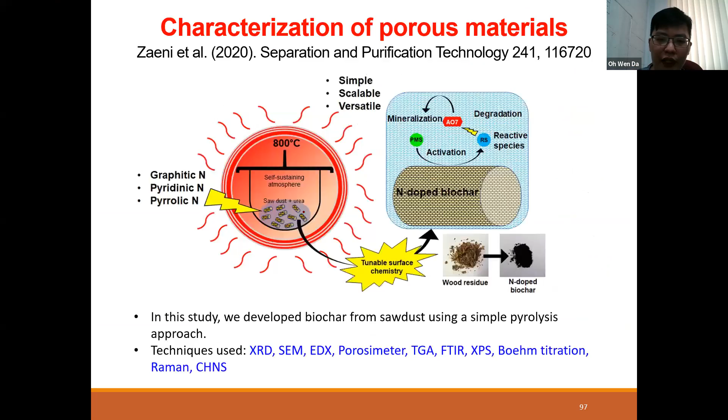Next week I will give you an assignment consisting of a lot of questions for the students to answer. Then in week 6, we have a presentation assignment, where students will have to upload a video of a presentation - it depends, you can do it in a group or individually. I will give you more details in week 6.